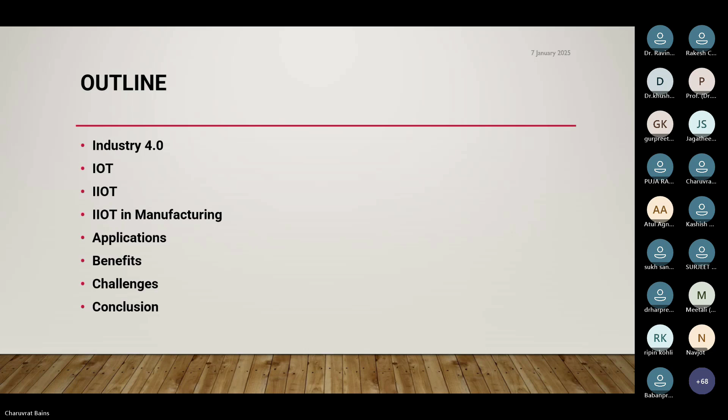To start, before discussing IIoT, we should have a slight introduction about Industry 4.0. I think most of the participants have some idea about Industry 4.0. When we talk about Industry 4.0, we can say it marks the fourth industrial revolution, which is built on the previous revolutions: mechanization for Industrial Revolution 1, mass production for Industrial Revolution 2, and automation for Industrial Revolution 3. Now, by incorporating digital and smart technologies, we are here in Industry 4.0.

Let's think about how factories operated 50 years ago, relying on manual labor and basic machines. Compare that with today's factories, where we use robotics, data analytics, and artificial intelligence to optimize each process. The goal of Industry 4.0 is to create systems that are interconnected, automated, and capable of self-optimization. These systems use data not only to respond to changes but also to predict and prevent issues before they occur.

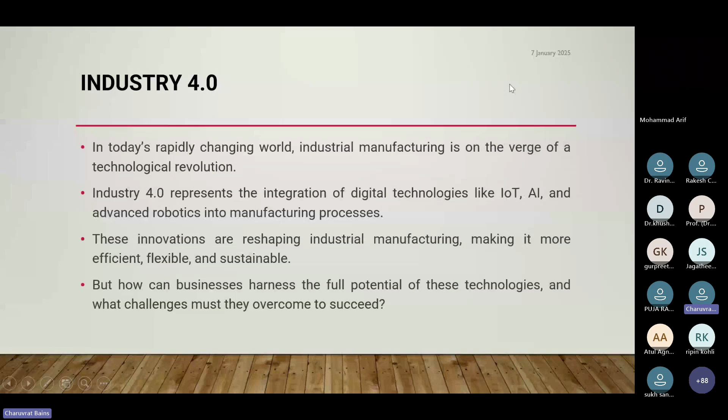Before switching to IIoT, we should first talk about IoT. Here in the slides, participants, you can see there are a number of technologies written, which are the key technologies driving Industry 4.0.

First and foremost is IoT, the Internet of Things, which connects devices to share and analyze data. We have a number of devices which are interconnected to each other, and with the help of sharing data, we can analyze it.

Second technology is artificial intelligence. In brief, we can say this technology enables us to learn and make decisions.

Another important technology is advanced robotics. With the help of robots, we are automating tasks which are beyond human capabilities.

Next we can talk about cyber security. Our main aim here is protecting our interconnected systems from threats.

Another important one is additive manufacturing, which we call 3D printing, also used for customized parts on demand. Then we have big data analytics, which uses the processing of vast amounts of data for insights.

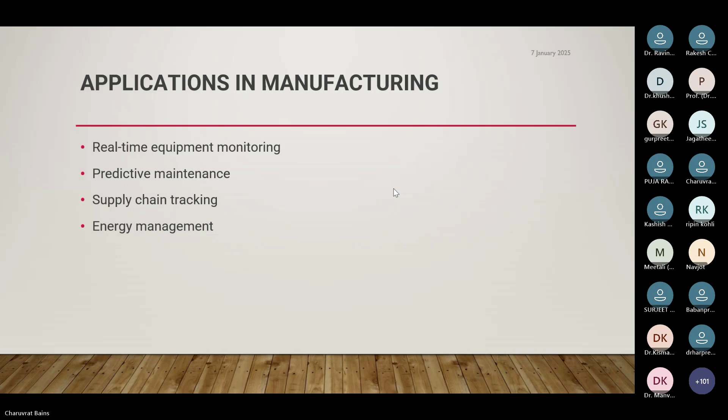So the manufacturing industry is revolutionizing through smart connectivity. Till now, we have discussed some points on Industry 4.0 and had some detailed discussion on IoT.

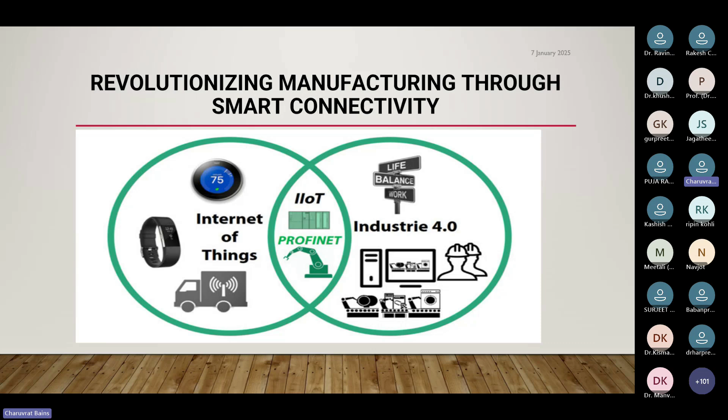Now, this particular slide gives us the view that IIoT is a subset of Internet of Things, which is nothing but Industrial Internet of Things. One extra I is added to the term IoT and it becomes Industrial Internet of Things, which focuses on industrial applications of IoT, particularly in manufacturing, logistics, or other utilities, where we are using smart sensors and devices to connect our machinery and processes.

So IIoT, or Industrial IoT, involves the use of smart sensors and devices in industrial operations. This is the foundational technology for Industry 4.0 initiatives, using smart sensors and actuators to connect people, products, and processes to power digital transformation.

Using this industrial IoT platform, companies can connect, monitor, analyze, and act on industrial data in new ways to improve efficiency, maximize revenue growth, reduce cost, and more.

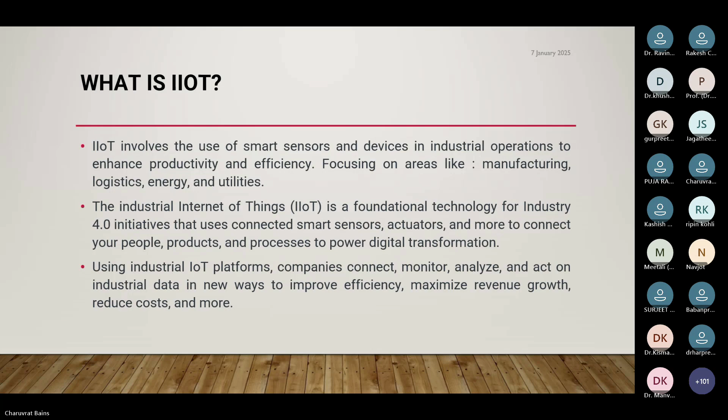IIoT integrates smart devices, sensors, and advanced analytics to improve manufacturing processes. It's a critical component of Industry 4.0, which enables real-time data exchange between machines and systems.

While the physical systems are made intelligent using IoT, the real-time communication and cooperation between each other and with humans is established via the wireless web. So we can say this IIoT brings the concept that a connected factory leads to a smart factory.

IIoT focuses on the use of cyber physical systems to monitor the physical factory processes and help us make data-based automated decisions. So the factory which is connected leads to a smart factory, and this is the base of industrial IIoT.

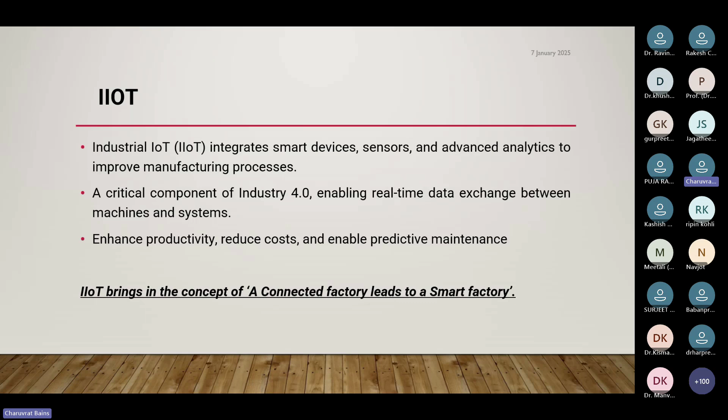A smart factory is where all equipment is connected, where the system monitors the production in real time, flags issues, and adjusts operations automatically to meet demand. So this is what today's world is, that is the smart industry.

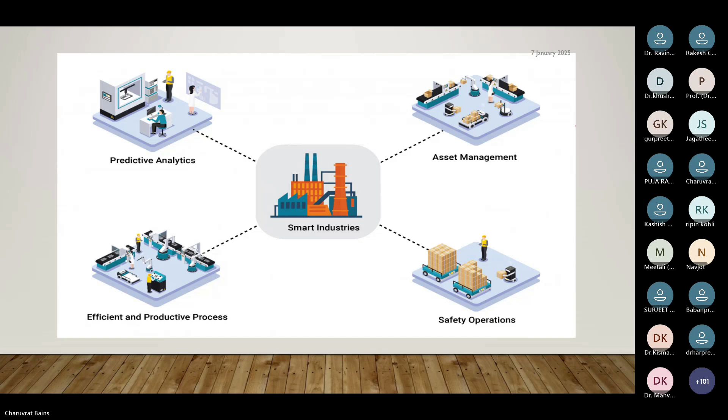Now in IIoT, we have a number of key components to understand. Starting with the first key component of IIoT, that is the smart devices and sensors, which collect data from the machinery or capture data from the machinery.

Another key component of IIoT includes the industrial gateway. The function of the industrial gateway is that it helps enable communication between devices and cloud platform, or we can say it acts as a bridge between the device and the cloud platform.

Then we have the connectivity protocols. These connectivity protocols, for example Wi-Fi, Bluetooth, and Zigbee, help us ensure seamless connectivity so that there is no hurdle or intervention in the connection.

Another key component of IIoT is the cloud platform. The function of the cloud platform is to store and analyze the data, especially large volumes of data.

Then we have AI and ML, the machine learning and artificial intelligence, which generate actionable insights from the data stored. Then another key component is the security system, which protects the IIoT system from cyber threats.

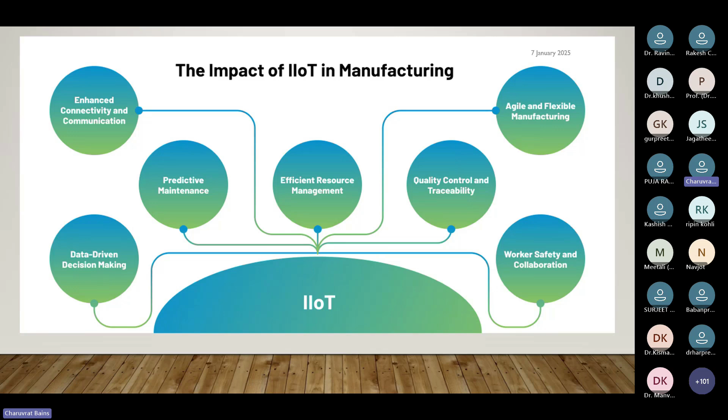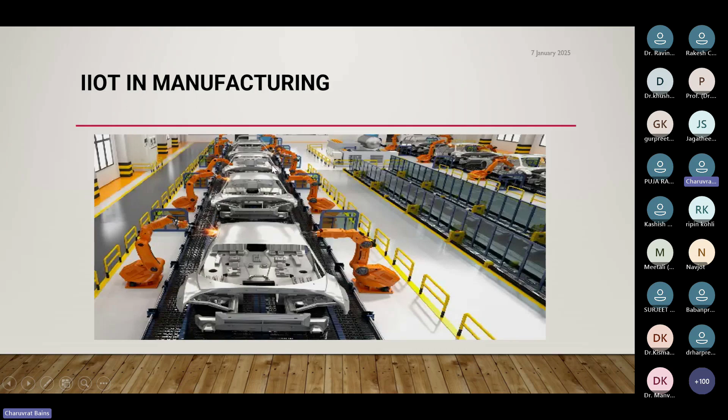So this is a picture where in an industry, IoT is implemented. If we talk about IIoT in manufacturing, there are a number of different areas we can discuss in detail for any manufacturing industry. So I have jotted down a few points to explain this, that is IoT in manufacturing.

To start with, first is the digital or connected factory. Participants in a digital and connected factory include IoT enabled machinery, which can transmit operational information to partners, for example, original equipment manufacturers and field engineers.

So the factories are digitally connected, and these we term as IoT enabled factories or IoT enabled machineries, which are used to transmit information related to any operational information and other required information to the manufacturer or to other engineers. So this is one of the major applications in manufacturing, that is the digital connected factory.

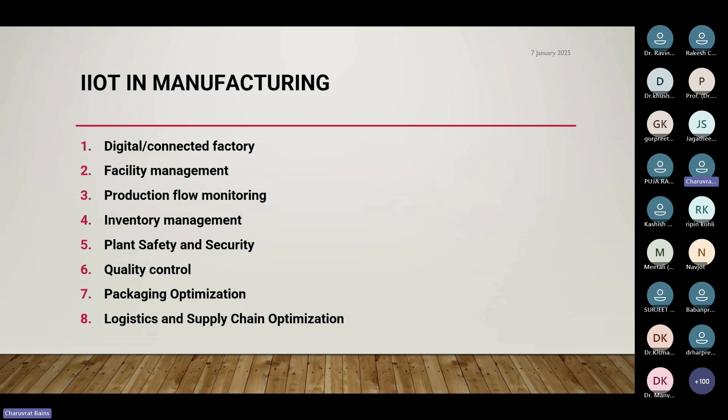And last is logistics and supply chain optimization. Again, this industrial IoT can provide access to real-time supply chain information. When we talk about real-time supply chain information, we are concerned with tracking the real-time situation of materials, equipment, and product as they move through the different phases of the supply chain. So these are the important areas in manufacturing where IIoT plays an important role.

Now participants, we can divide industrial IoT into different areas, but the most important area we are talking about, especially in terms of manufacturing, is the smart factories. In smart factories, by implementing Industry 4.0 strategies through the use of industrial internet, we have the factories of the future.

So smart factories are interconnected networks of machines, communication mechanisms, and computing power. The smart factory we are talking about here is nothing but a cyber physical system which uses advanced technologies such as AI and ML to analyze data and drive automated processes and learn as it goes.

We can say these are interconnected networks which use different key technologies of Industry 4.0, whether in terms of AI, IoT, robotics. And these factories achieve unprecedented levels of efficiency, safety, and sustainability. So these smart factories are nothing but the transition to IIoT, which involves adopting the Industry 4.0 strategy so that they stay competitive. Today's smart factories leverage innovative technology and data to achieve a level of manufacturing performance unsurpassed in history.

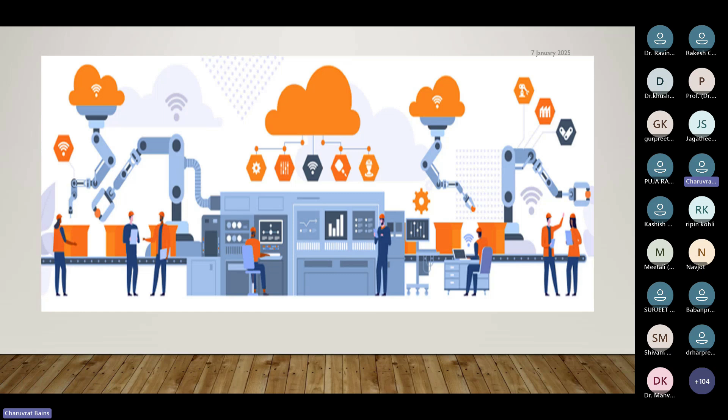So when we talk about the different steps, before going through the detailed step-by-step procedure, we have to first assess our needs and identify the problem. Then we have to define the goals, then choose the team, then analyze what we currently have in hand, what the current system is all about.

According to the current system, we have to choose the IIoT platform, and then choose the technology. In choosing the technology, we have to first connect the devices, collect and analyze the data, and then implement the changes. When we are done with the implementation, we have to monitor and optimize.

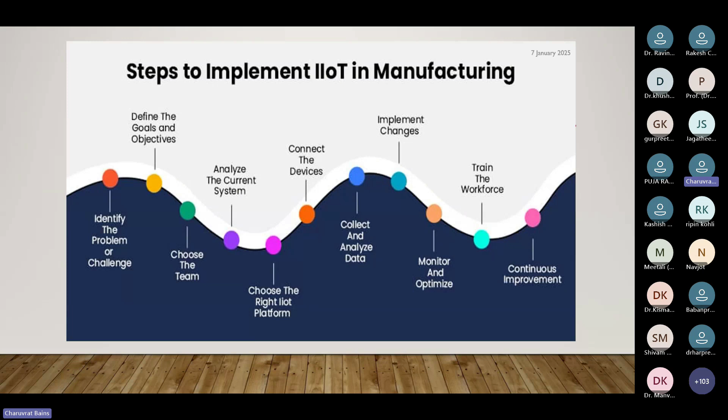Once we are done with the pilot project, the important thing is that we have to train the workforce, upskill the employees so that the IIoT integration can be done. And this is a continuous process, you have to do the same cycle again.

So this is just a slide to show how IIoT can be used in manufacturing. Now participants, once we are done with how we can adopt IIoT in manufacturing, we will move to some of the applications of IIoT in manufacturing, especially in the real world.

Smart factories are very common examples which we have just discussed, where we are doing the automation and optimizing the production lines. Then we can have digital twins, where we have virtual models of physical assets for simulations and analysis.

Then another example is predictive maintenance in action, where we can detect any error or wear and tear in machines. We can detect it early if we follow this predictive maintenance approach. Then supply chain optimization can also be done with the help of real-time tracking and inventory insights. So these are some of the real world applications of IIoT in manufacturing.

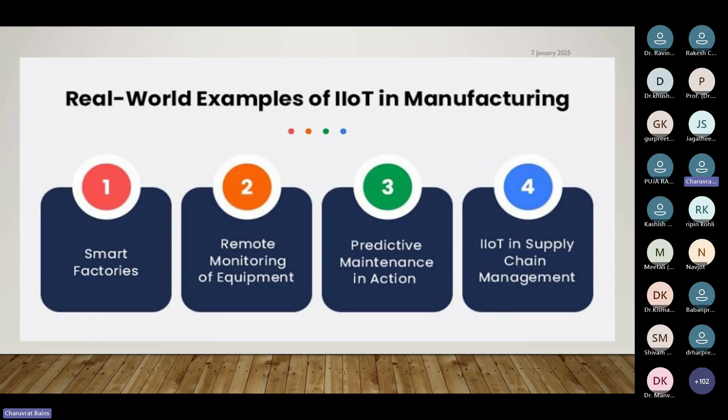Now, if we talk about the applications of IoT in the manufacturing sector, there are a number of applications. Some of these we have already discussed. Others include intelligent product enhancement, quality control, predictive maintenance, inventory management, product safety, improved facility service, dynamic response to market demands, and smart packaging.

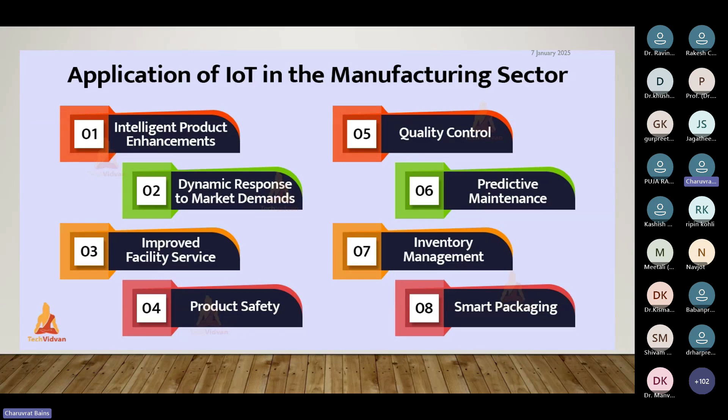Now, there are a number of benefits of IIoT, specifically in manufacturing, industrial IoT systems.

These systems are made powerful by connecting devices and machines, which can speak the same language, monitor and analyze the performance of an industry or industrial performance data, and simultaneously allow real-time visibility into what's going right, what's going wrong, and even predict when something will go wrong with the help of predictive maintenance.

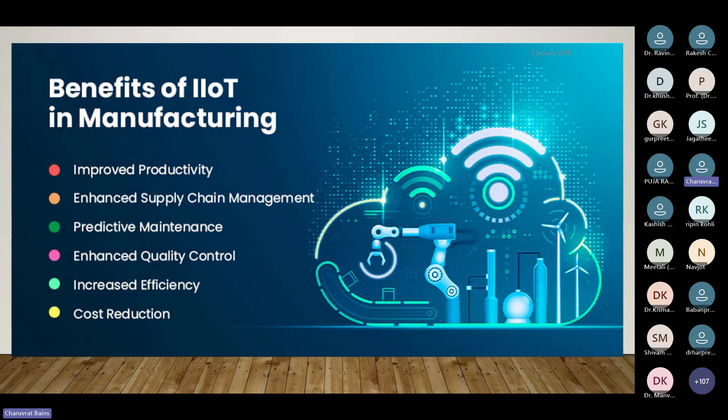So there are a number of benefits of switching to IIoT in manufacturing, but along with benefits we have certain challenges too. Challenges in implementing IIoT include high initial investment, because we are switching over from our current infrastructure or setup to a new one. This IIoT requires a high initial investment for upgrading the infrastructure.

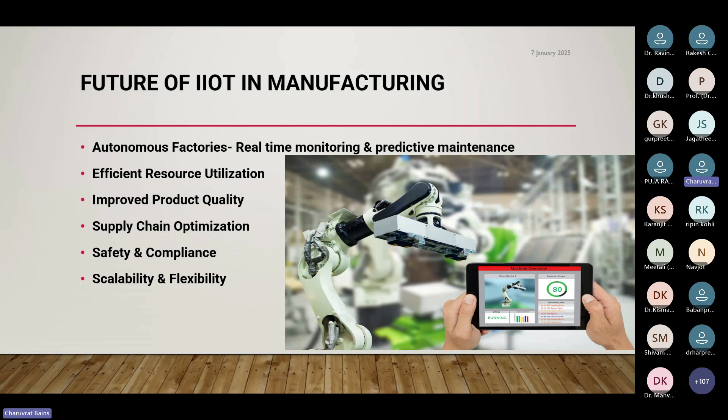So participants, to conclude my presentation, we can say that IIoT is transforming manufacturing by connecting machines, systems, and processes. We have discussed the benefits also, which include enhancing efficiency, cost savings, and improved quality. Along with benefits, yes, we have challenges also, and despite challenges, the future of IIoT is promising with advancements in technologies. Companies embracing IIoT gain a competitive edge in the era of Industry 4.0.

IIoT connects machines, systems, and processes, making these things smarter and more efficient. Yes, there are challenges, but its benefits are undeniable, and this gives companies a competitive edge.

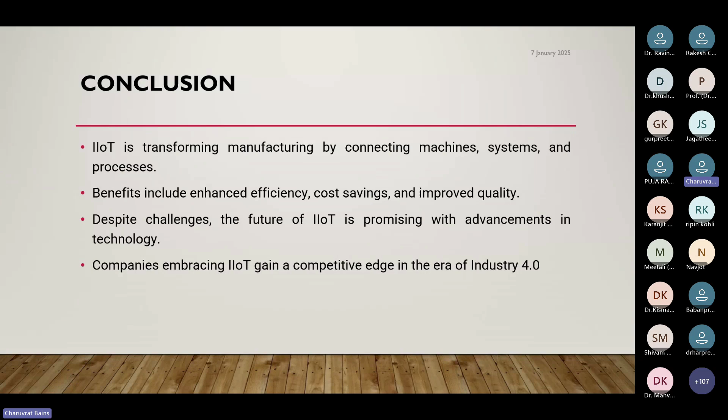So we have learned that IIoT transforms manufacturing by connecting machines and enabling smarter systems. Now there is a need, a call to action, to emphasize the need for adaptability and innovation in adopting IIoT. So to conclude, IoT is not just a trend, it's the future of manufacturing.